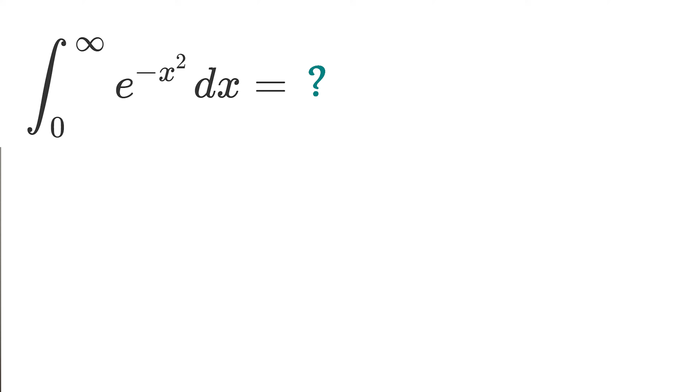Computer-aided engineering is my favorite part of mechanical engineering, even though everybody loves math—I mean, who doesn't love solving integration problems and complex algebra? This field can be subdivided into CAD, computer-aided design; CAM, computer-aided manufacturing; FEA, finite element analysis, stress analysis; CFD, computational fluid dynamics; and many more fields.

In my opinion, you should have at least minor experience in each and every one of these, and then pick one of them to explore further in an internship or a project. This will allow you to have some experience to bring to your first job and start your career beautifully.

The first one students get exposed to is CAD, computer-aided design. In short terms, it's 3D modeling, but that term could be conflicted with 3D modeling for video games, for architecture, for decoration, and many other fields.

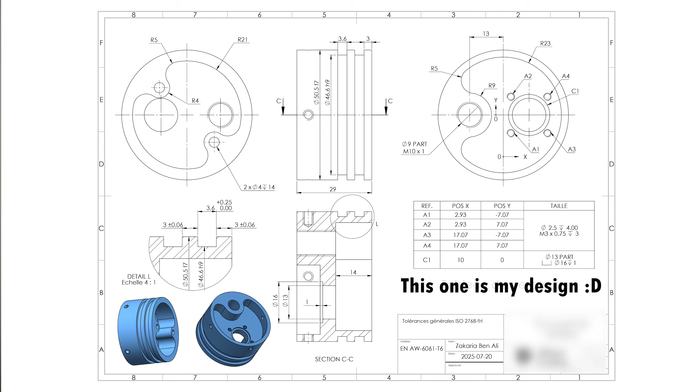You can start by learning the basic tools in order to recreate something you could imagine, but then I would advise you to eventually get into design for manufacturing. It is designing a part while thinking of the way it's going to be manufactured. For example, when extruding a part, you're going to be thinking that it's going to be CNC machined, and when doing a revolved boss, you would think that it's going to be made on a lathe machine.

Some people focus on getting as many certifications as they can in many different software and then try to use that to get their first job, but at the end of the day you should stick to one, learn it very well, understand the principle behind creating the 3D shape you imagine, and then you could move on and jump from any software to another.

As my professor once told me, you should never let the software be the obstacle. As an engineer, you should be able to use any CAD software intended for engineering, take a day to learn where the different buttons are, and then you should be able to use it professionally.

Another aspect of computer-aided design would be assemblies and motion studies. In the end, I want to emphasize that this skill is really important in your training as a mechanical engineer.

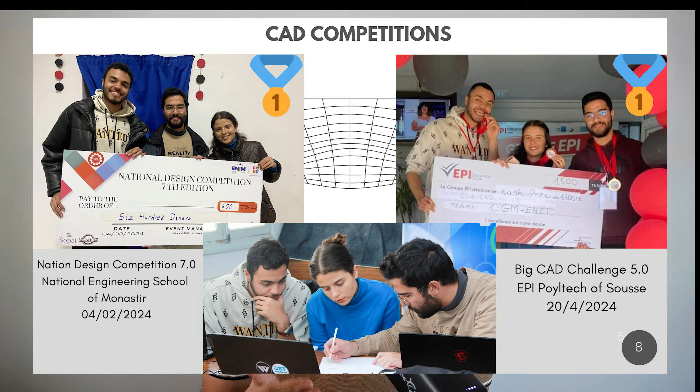You could, for example, take part in local CAD competitions like I did in my second year of mechanical engineering. I competed in more than 3 of these competitions with my team and won 2 first places and 1 second place. To give you an idea about these events, this was the topic of one of the competitions.

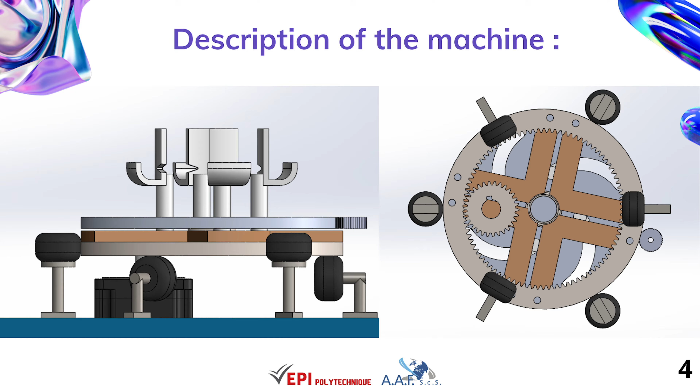We had 12 hours to design and assemble a machine that would roll cables with different lengths and then zip tie them in 2 different positions, before defending this idea before a jury and explaining how each part worked in a 5-minute presentation, which is really tight on time.

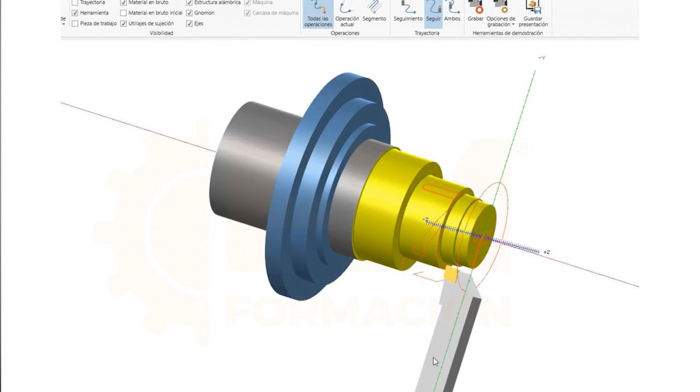Computer-aided manufacturing is the cousin of CAD, and it aims to define the process of obtaining the designed part in CAD from raw materials. After choosing the right CNC or machining center, you divide the process into different steps of material removal, drilling, milling, etc., all while controlling cutting speed, tool trajectories, specifying roughing and finishing passes to ensure maximal quality.

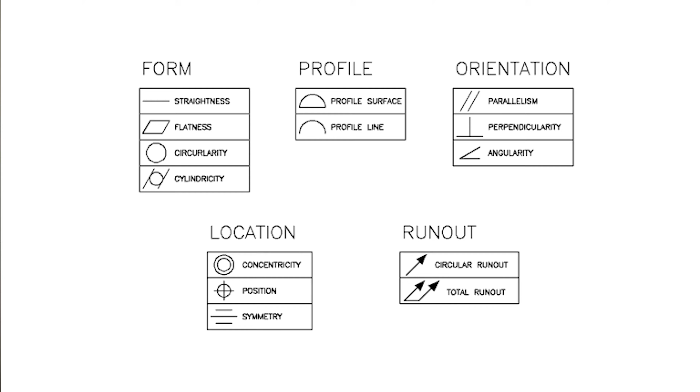To be honest, I didn't dive deep enough into CAM to talk about it in more detail, but I do have minimal experience and a basic understanding of it.

FEA, or finite element analysis—I really do like this subject, and I'm going to explain it the way my professor did, in one dimension. I could never do better. Suppose this is the real solution for a complex problem where conditions are applied on both ends, for simplicity.

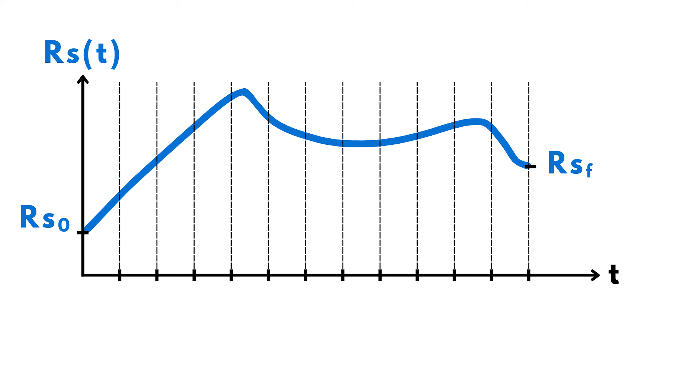Well, one way to numerically solve this problem is to decompose the domain into small segments and solve for each small segment by itself. We call this discretization. Bring the problem to 2D, then 3D, and you can basically solve the most complex physics problem given enough computational resources and the correct model.

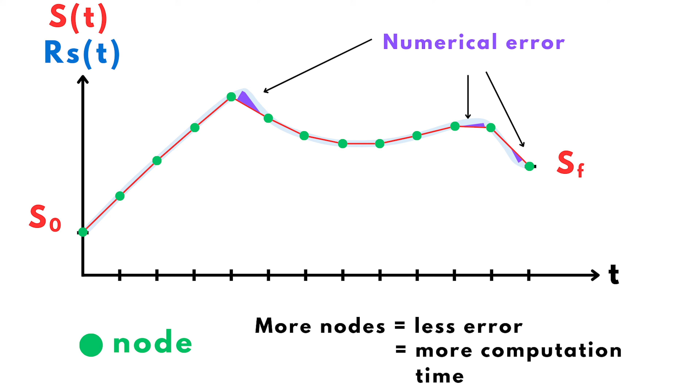Choosing the correct model is really important, as it means choosing the right equations to solve, and this would drastically change the correlation between the numerical results you got and the real-life experiment you could do in a lab, for example.

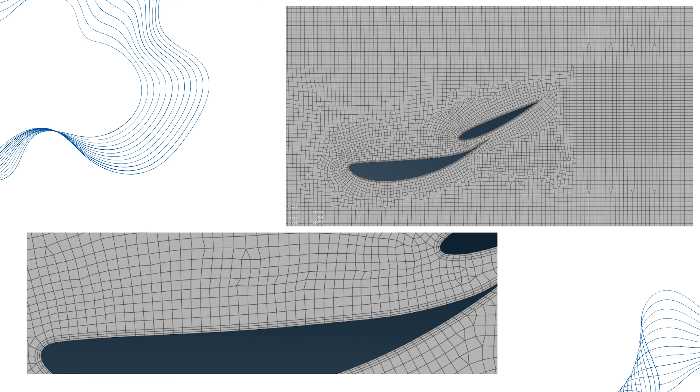What you see here is what we call meshing, and generating a good quality mesh is critical in order to reduce numerical error and eventually reach numerical stability. My professor used to say, a good mesh is a beautiful mesh.

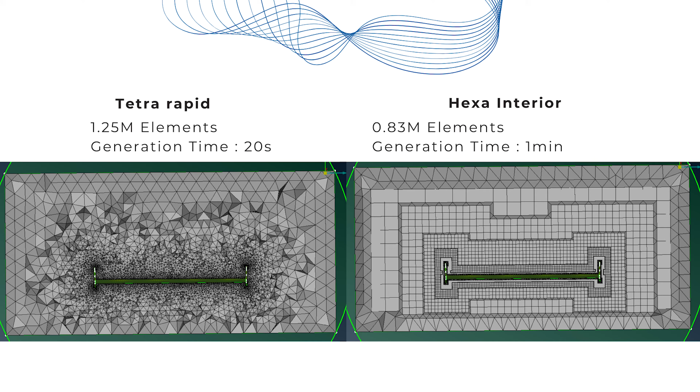Now, even if this first mesh is finer, the second one is more structured and wastes less processing time for the same or even better results. We use FEA for many types of simulations, and this is the first type of them.

Stress analysis is one of the most practical applications of FEA. Here we are checking if our mechanical design survives the loads we are going to apply in real life, by applying forces, constraints, temperatures, pressures, etc. Then the solvers give us stress, strains, safety factors, and even deformation.

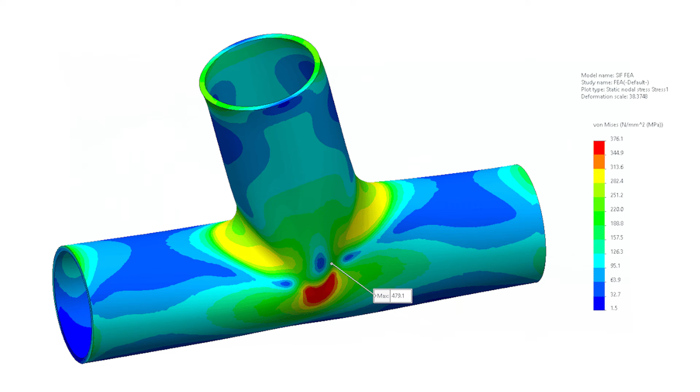The key to doing a correct simulation is to understand the physics behind it and the behavior of the material you're choosing. You need to pick the right material model, boundary conditions, and load cases. If you select a wrong part by mistake, you could get completely different results and a completely wrong stress distribution.

In one of my projects, I used stress analysis to do what we call a geometry optimization. We had the freedom to choose any type of mechanical part we wanted, so with my partner we chose to do a bicycle.

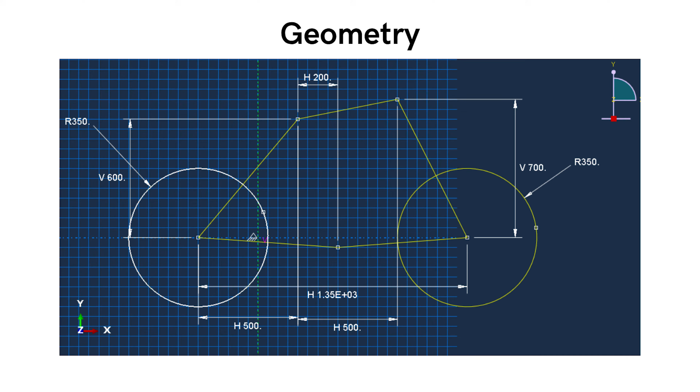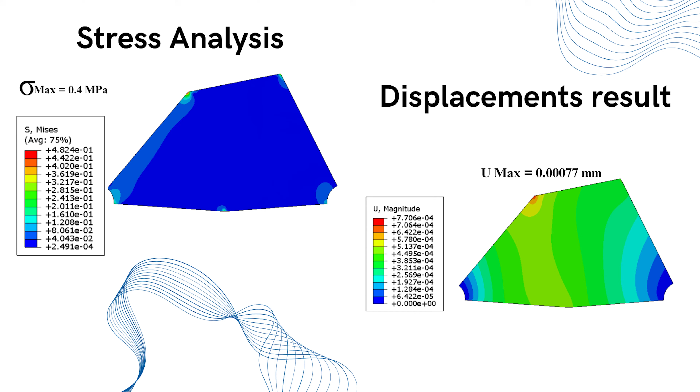We took an initial shape and made some hypotheses about the distribution of forces a biker would apply on the structure of a bike. We took a 2D problem to simplify it, and after getting the results of the stress distribution, we told the software to start removing material from the parts and then cycle in order to reach an objective function.

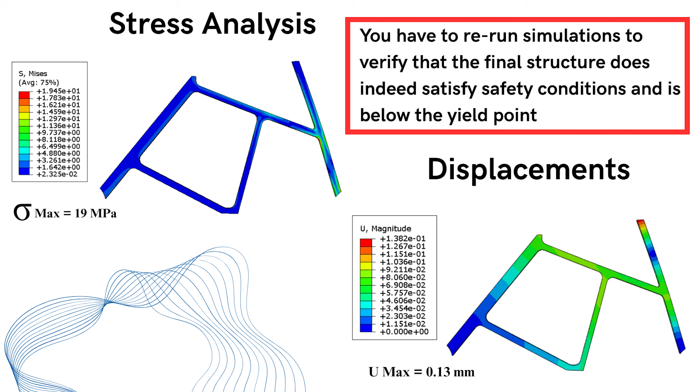Our function was to minimize the strain energy that would result in displacements and deformations. We told it to reach at least 50% of the initial volume, since the initial volume was a huge plate. This result would be completely different if we had chosen a different configuration or different loads on the bike.

This shows how sensitive the outputs are compared to your inputs. This is why you should be really careful in choosing the right conditions.

The last subject in this video would be CFD. It is the subject I personally have the most experience in, since I did a 2-month summer internship and my end-of-studies internship using CFD tools.

Computational fluid dynamics numerically tries to solve the equations that describe the motion of fluids. These equations are really complex and require good computational power to obtain significant results. Just like stress analysis, you need to define the correct boundary conditions, but also choose the right turbulence model.

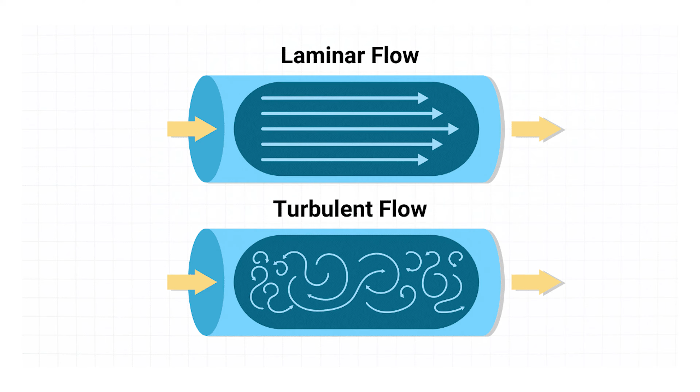Of course, to obtain correct results, you need to understand what you're doing and what type of equations you're solving, and what type of flow it is - laminar or turbulent - and even within turbulent flow there are different models to choose from.

When you obtain your results, they are not directly available, which means you need to do what we call post-processing - the part where we calculate the resulting forces or the pressure applied on a surface, for example, to describe the interaction between a fluid and a structure.

If we take the wing of a plane as an example, we can calculate the pressure above and below the wing and then determine the lift force and the drag force.

Many things could go wrong in your simulations, starting from bad mesh quality and ending with a wrong decimal point, which completely destroys your results and gives you unrealistic behavior of the fluid.

In the end, this is just a brief introduction to mechanical engineering. If you're thinking about choosing this field in your studies, I really advise you to, but it's really for people who love this field and want to work in the automotive industry, the aerospace industry, the marine field, or the industrial field. You have so many different fields to choose from later on, and this is a really good advantage of mechanical engineering.

In the end, I want you to remember that mastering the fundamentals is what makes you a powerful engineer.